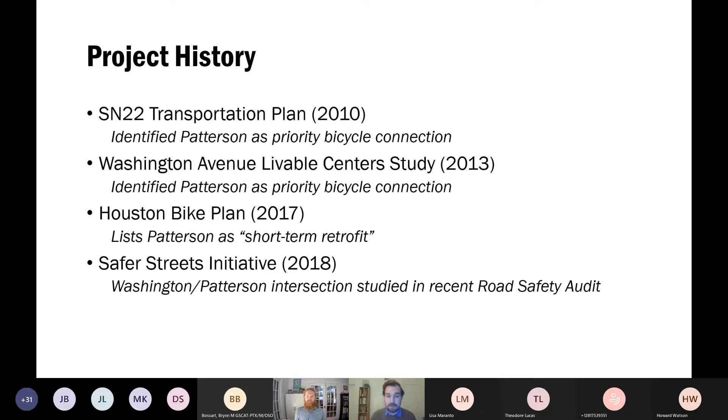And then again in 2018, this is not the entire corridor, but the intersection at Washington and Patterson. In the summer of 2018, Mayor Turner commissioned the city departments to look at the most dangerous intersections in the city to see what could be done to improve safety and comfort in those locations. Washington and Patterson was selected as one of them. So later in 2018, early 2019, a multidisciplinary team of state, federal, local, and advocacy group transportation experts took a look at Washington and Patterson to see what could be done there.

A little bit about the public engagement that the planning department has done on this project. We had our first meeting for the project in earnest in November 2018. That was at the Council on Recovery. I'm sure many in attendance tonight were also at that meeting.

We then had a series of meetings directly with the West End Civic Club, first in February 2019 and then again in May of 2019, where we talked a little more about the specifics of the project between Washington Ave and White Oak Bayou. We met again in June of 2019 with the Magnolia Grove Civic Club to gather feedback on the proposal. And then again, in January 2020, we had a pop-up bike lane event on Jackson Hill at the intersection with Scotland at the entrance to Buffalo Bayou Park, where we had a lot of attendees and gathered a lot of feedback and had folks actually able to test out the design for that intersection and for Jackson Hill Street.

So we've had quite a few touch points so far, but we have more news to share tonight.

A little bit about the project in general. This project aims to create a safe bicycle connection from the White Oak Bayou Greenway at the north, across I-10, through the West End neighborhood, across Washington Ave, and then down through the Magnolia Grove neighborhood, east-west via Blossom over to Jackson Hill, and then down Jackson Hill to the intersection of Scotland Street and the pedestrian bridge to Buffalo Bayou Park. Not only will this project create a safe and comfortable connection over a number of barriers like Washington Ave and I-10, but it'll also connect you to our emerging Bayou Greenways network.

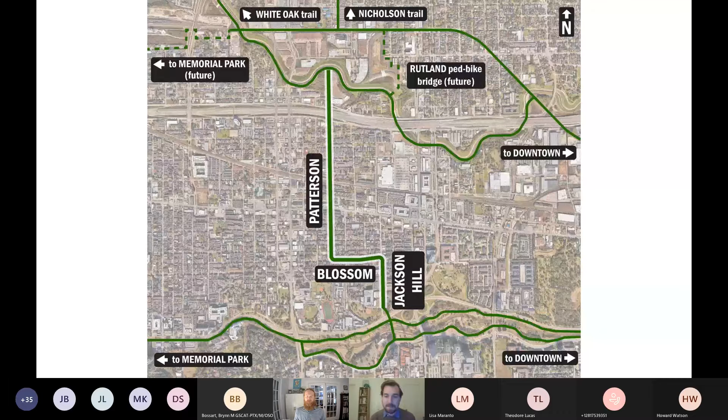And you can see on this map right here all of the new or future connections that you'll be able to make immediately from this bikeway. And then here's just a larger view of the bikeways in Houston, either existing, recently constructed, or on the books to be constructed in the next few years. Within the red circle is the Patterson Bikeway, but from there you can see a great number of places within the inner loop and beyond that you'd be able to connect to safely on your bicycle when this project is complete.

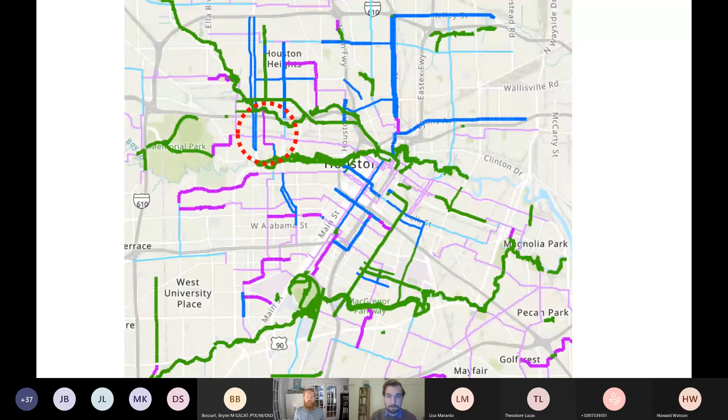So we're going to go north to south, talking about the different pieces of the project. There's a few different streets, a few different intersections, and some varied terrain, so there's various different treatments depending on where along the project we are. On Patterson Street, from White Oak Bayou to Washington Ave, it's an existing roughly 36-foot, sometimes wider, sometimes narrower cross section, especially over I-10, but this is generally the cross section you're looking at.

With parking on either side, our proposal is to make this a neighborhood shared street, to put in striping and signage to better communicate to folks that this is a shared environment between vehicles, cars, and pedestrians, and to get car traffic, especially, to slow down, make cyclists a little bit more predictable, and otherwise make the street safer. This is not the only means by which we hope to make Patterson a more comfortable environment for everybody. We have a few other more specific treatments for this stretch that should hopefully, in addition to the pavement markings and signage, make this a safer neighborhood street.

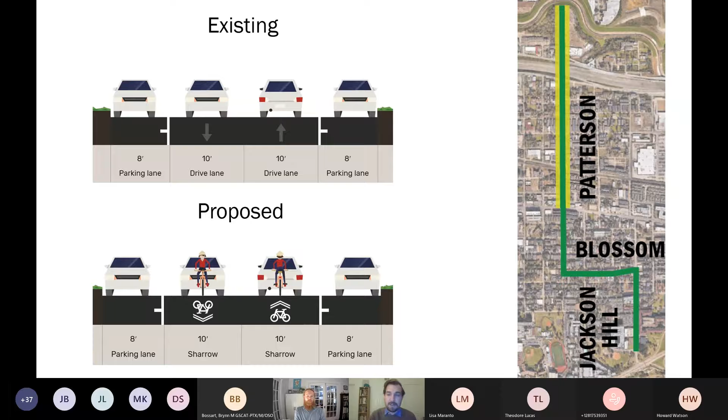So first, at the intersection of Patterson and I-10, particularly the eastbound frontage road on the south side of the freeway, we're proposing a short stretch of bike lane, about 100 feet, northbound in advance of the feeder road, to allow vehicles and bikes to separate out.

And then once at the intersection, cyclists have a little bit of a lead on the cars. So when it becomes their turn to cross, they're more visible to vehicles and they get first dibs at getting across over to the bridge.

Part and parcel of this treatment is also a no right turn on red at this intersection. At present there's a steady stream of cars taking a right from Patterson north to I-10 east, either on a green light or on red, which makes it difficult for cyclists to catch a break as they're coming across. So this will require all drivers to stop until there's a green light, allowing cyclists to get a lead on the intersection.

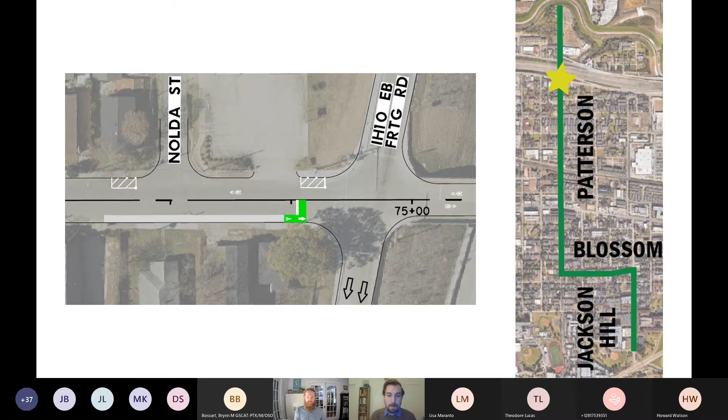That's a pretty narrow bridge. It's not really wide enough for a bike lane, but we think that this bike lane in advance of the intersection will make that experience a lot safer.

And here's an example of what a bike box looks like in the wild. This isn't in Houston, but you can get the idea of how cyclists are much more visible at intersections with this sort of treatment.

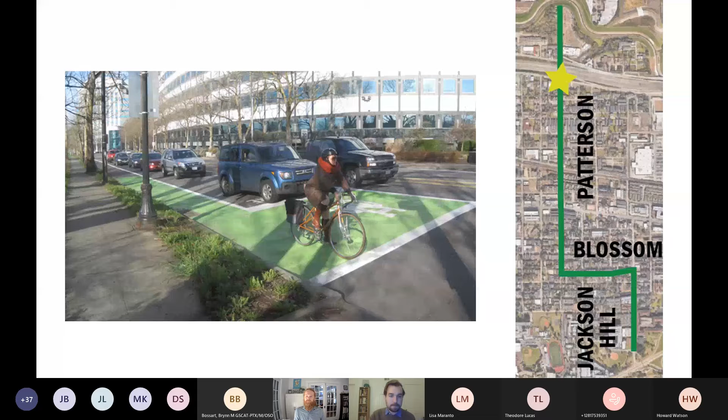Moving down, this is at the intersection of Inker to the west and Marina to the east. We're proposing a traffic safety island at this intersection to slow vehicles down. This is a tricky intersection - there are a fair amount of driveways, and also on Inker to the south, or on the east side of the street at the Inker intersection.

And on the west side of the street at the Marina intersection, it's really one intersection, and people, according to Texas state law, should not be parking there to begin with. So this is meant to better clarify what existing state law is around parking near intersections, and also to have drivers slow down by moving a little bit into the other lane. This is called a chicane in traffic speak, and it interrupts this long straightaway from I-10 down to Washington, better communicating to drivers that they're now in a slower, more local street environment.

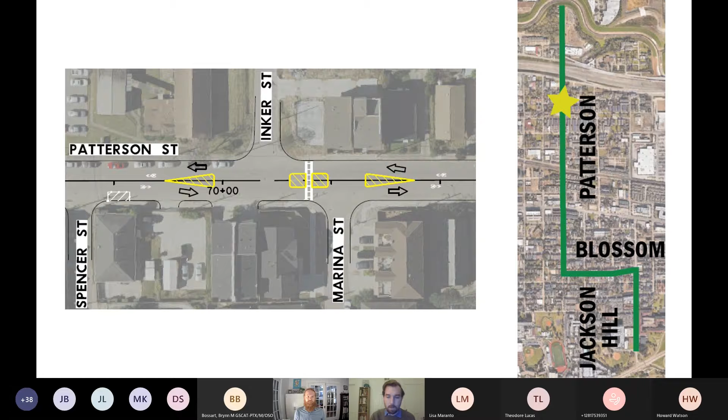A little farther down, this is Patterson at Maxey Street to the west and Kohler Street to the east. It's also right at West End Park. We heard quite a bit from the neighborhood that this is a rather dangerous intersection with pretty poor visibility - people come speeding down Patterson, and if you're exiting from Kohler or Maxey onto Patterson, you don't have great visibility and the cars are often moving relatively fast.

So our proposal here is to make this intersection an all-way stop. So no matter what street you're on, you'll have to stop, look around, and then only move once it's safe to proceed. We're also proposing some daylighting at this intersection. So in the 30 feet or so from the intersection where it is illegal to park, we're simply going to stripe that out and also use some physical obstruction to better communicate that it's not a legal place to park, and to establish a visibility triangle at those intersections.

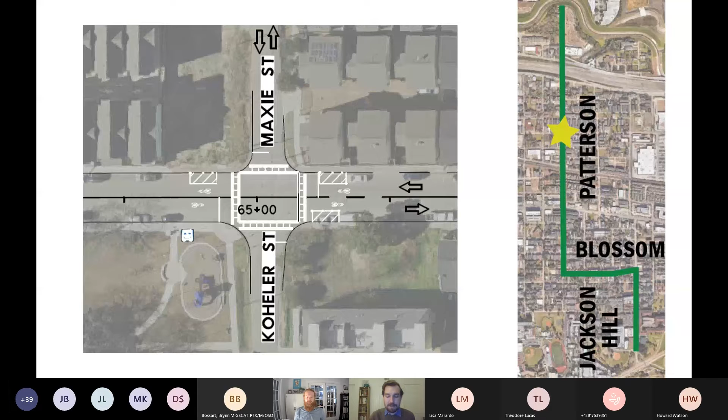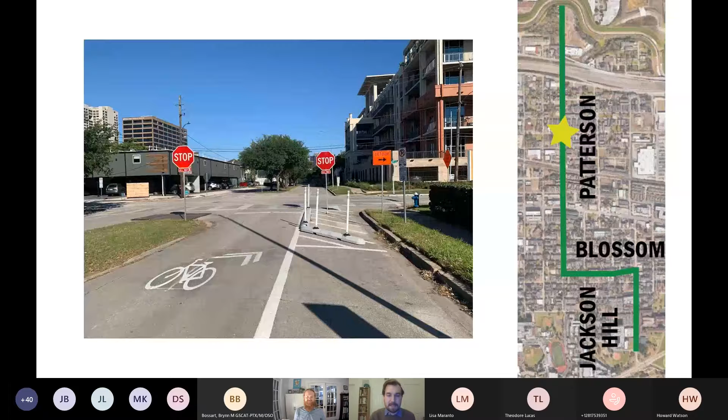At present, people walking and on bikes have to wait for a break in traffic in both directions and then cross 5 lanes. What this treatment would do is allow folks to cross one lane, one direction at a time, and only to cross 2.

So it's a much shorter crossing distance in each of those, giving them a space to wait in the meantime. This is the deluxe treatment of the range of median closures. Some allow left turn movements across the main street, but we're really going for the deluxe treatment here, which we think is quite a bit safer.

At present, folks can make a left off of Washington onto Patterson, and folks going down Patterson can either go straight or make a left. This would basically restrict all vehicle movements at this intersection to right turns, and we think this makes things a lot safer for all road users here.

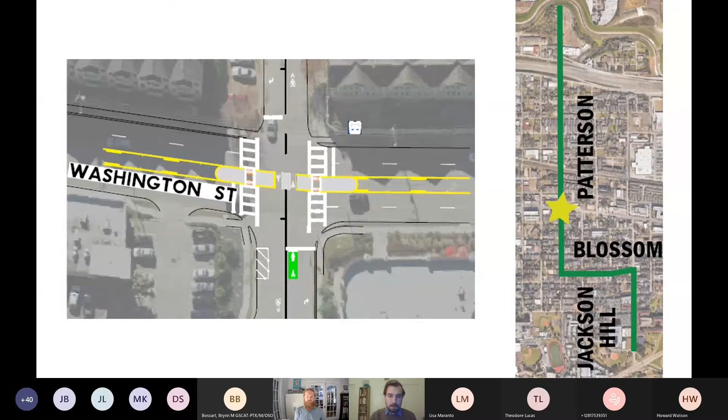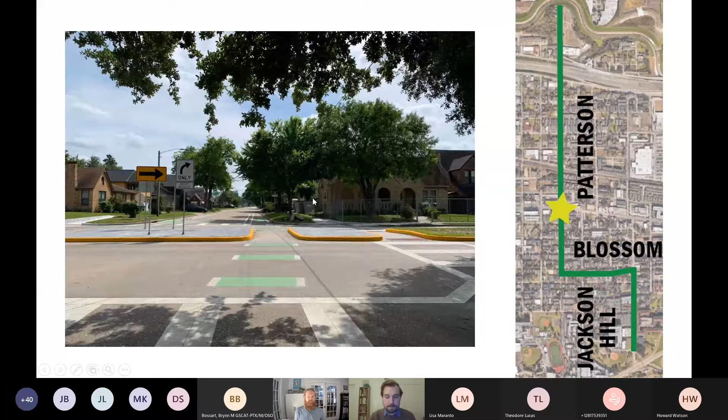Moving on down to Patterson Street south of Washington and Blossom Street between Patterson and Jackson Hill Street. This is a relatively narrow street, about 20 feet paving, often with open ditch. Folks are driving relatively slowly on these streets to begin with. They're very much neighborhood streets, so we're just trying to encourage that a little bit more with shared lane markings and signage.

Next is the intersection of Blossom and Jackson Hill, where folks will be transitioning from Blossom onto Jackson Hill and vice versa. This is currently just a one-way stop from Blossom, and Jackson Hill can move through here. We're proposing an all-way stop at this intersection to make all users slow down, take a look, see who else is there, and then proceed when safe.

We're also proposing a bike box on Jackson Hill going northbound, transitioning onto Blossom. This will allow folks to get out of the bike lane we've proposed for Jackson Hill, get a lead on the cars at the all-way stop, and then transition onto Blossom Street.

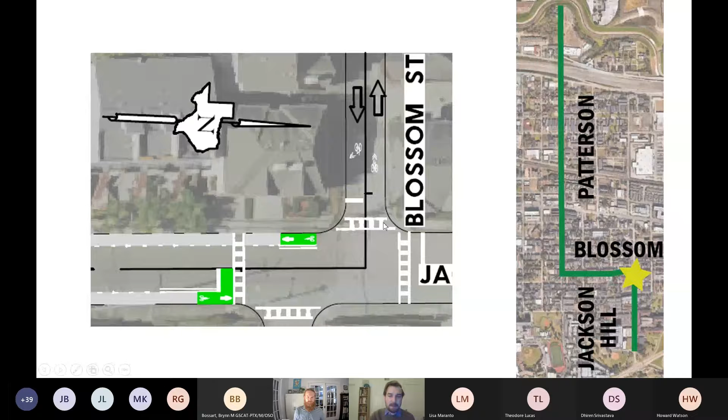Moving on down to Jackson Hill Street, between Blossom and Scotland Street down by Buffalo Bayou Park. This is an existing street that's about 36 feet paving section with 2 drive lanes and parking on either side.

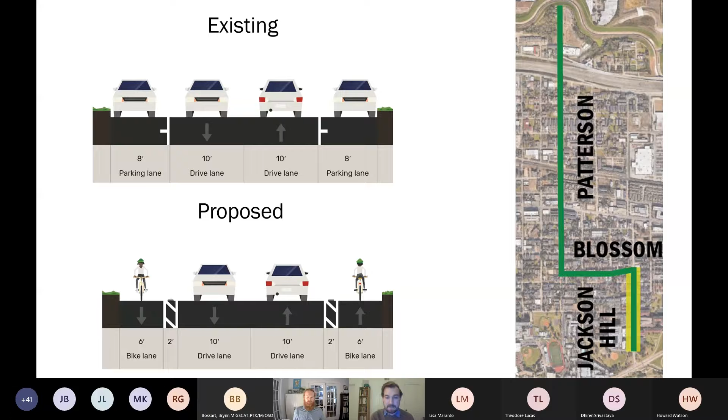What we're proposing is bike lanes on either side, repurposing the parking lanes and physically separating them with some sort of physical delineator. Jackson Hill has a lot of cut-through traffic that comes off of Memorial Drive, and we think the safest treatment for Jackson Hill Street is dedicated bike lanes on either side.

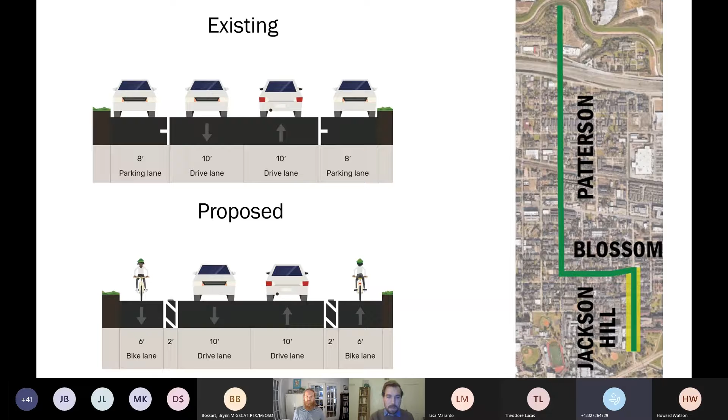This also transitions well into what we've proposed for the intersection of Jackson Hill and Scotland, which is what's called a protected intersection, where the bike lane movements are moved to all 4 sides of the intersection, more like the crosswalks, with cyclists crossing one side at a time.

Protected intersections really work best with bike lanes on the approaches, so bike lanes on Jackson Hill, which will be the major bike route through this area, are especially important in conjunction with this treatment. This will also allow cyclists to move onto Scotland Street from Buffalo Bayou Park if they choose, but that won't be the primary bike route through the neighborhood, so those bike lanes only extend a short bit out of the intersection.

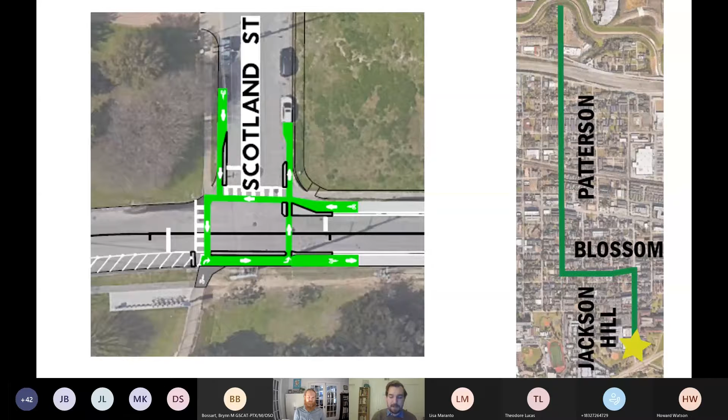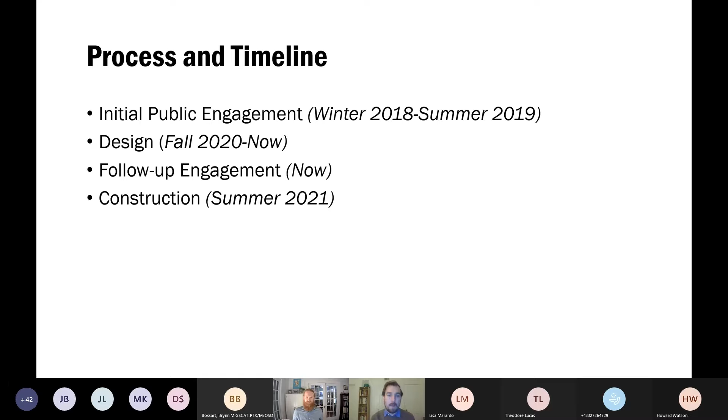Just a snapshot of where we've been so far. Like I mentioned previously, our first engagement for this project was in winter of 2018. For the past few months, roughly fall of 2020 until now, we've been working on these design drawings I've been showing tonight. With the feedback we get tonight, we'll further refine them, and we hope for construction to begin sometime in late spring or summer of 2021.

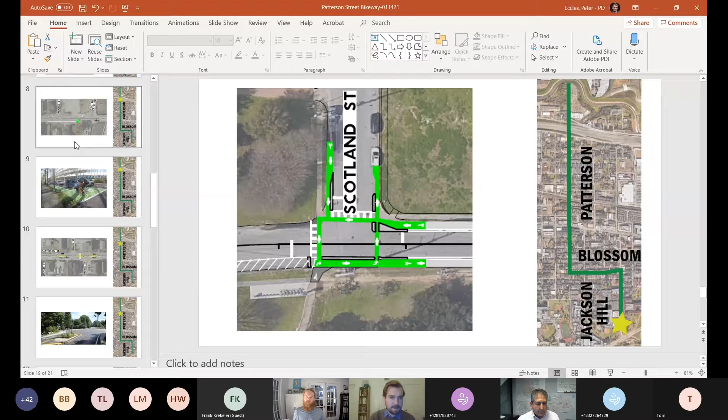Could I ask whoever asked that question to elaborate which portion of the Heights bike path? Are you referring to this Rutland Ped bike bridge? Yeah, I was referring to the part that connects Patterson to the bike path, wherever it connects into the main path, into the White Oak Trail. Oh, so at present it connects directly into the White Oak Trail right there. You can ride Patterson directly to the White Oak Trail today. This project aims to make Patterson a more comfortable street to ride on, but that connection is already open.

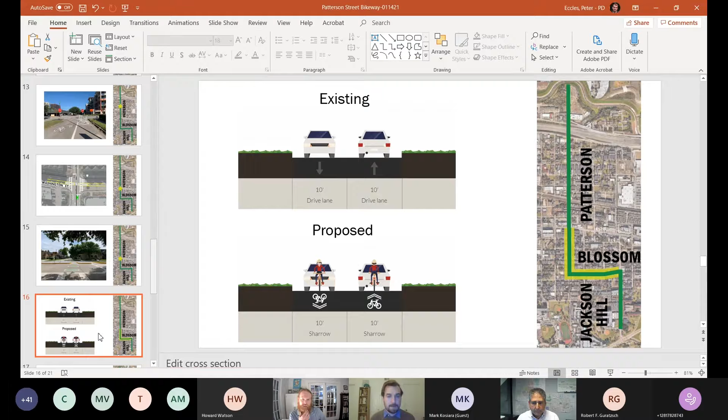Sure, I can elaborate right there. So Patterson north of Washington is substantially, maybe twice as wide as Patterson south of the intersection. We believe in that wider stretch that we can offer a short stretch of bike lane, this time on the left hand of the driver, to position people to that median opening for cyclists and to separate out that conflict before the intersection. On the approach south of Washington, if you're traveling north on Patterson to Washington Ave from the south, that's a much narrower street right there. So we don't think we're able to provide a dedicated bike lane in that space. In that area, the cross section would look much more similar to the rest of Patterson and Blossom south of Washington. And Pete, just to emphasize, that's a very short segment of bike lane. Yes.

That's really just approaching the intersection to help bikes get into a position to cross safely. And we looked at carrying it as far back as possible, but at a certain point you lose some of the benefit because you have a lot of driveways on each side of the street. So I think that's not typically where you'd expect a bike rider to be, in the middle of the street necessarily. Here is kind of a special case. We want you there because all the cars you're going to be conflicted with are going to be taking a right turn. So let's separate out the right turn movement from the bike movement, and that'll position you for the gap in the median.

Oh, excellent, okay, now I understand. Can I assume there'll be stop signs north and south and no special reason to slow down east and west? There will be signage that you're approaching a high visibility crosswalk. There'll be signage that tells you to yield for pedestrians and cyclists in the crosswalk, but there will not be a stop sign along Washington. Yeah, won't be a stop sign. We'll be using yield ahead, and some extra pavement markings and signage that really should help there, and we'll see how that works. Excellent, thank you.

Okay, back to the hands raised. Howard Watson. You've answered my question, thank you.

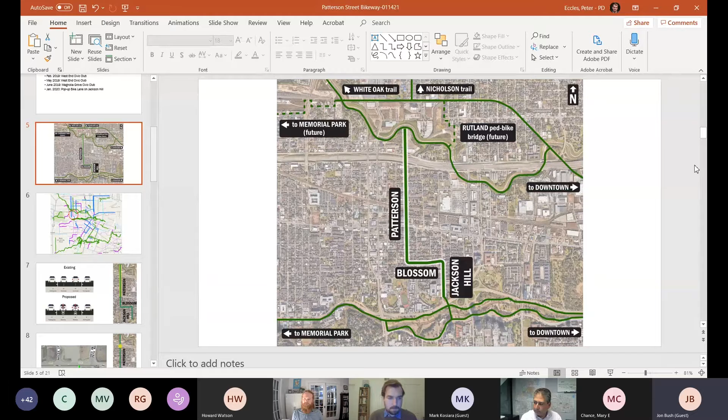Now in the hands raised, we'll go to Jon Bush. Hi, I guess I have 2 questions. The first one was just following up on that Patterson and Washington intersection. Will there be any type of pedestrian crossing signal similar to what's at Yale and the MKT trail?

So at this time, we are not proposing a traffic signal at this location. We think that the median closure is a good first step. And I can say that this treatment is very much compatible with a traffic signal if we decide to install one down the road. It's not one or the other, we're not precluding that. But within the scope of this project, the median closure is what we're proposing.

Okay, and then the other question I had: at the Patterson and I-10 feeder intersection, will there be a separate traffic signal for cyclists similar to what you see at the Lamar Street bike lane through downtown? I'm not sure we'll have a separate signal head for cyclists.

Ian, you have? Yeah, we're not planning dedicated signal heads right now, or where specifically. We emphasize them more on our two-way bike lanes, where you'll have people on bikes moving both directions on one side of the road. That's not typically where you expect a bike to be at an intersection, and they also can't see the signal head, so we have to provide them one when they're moving in that direction. For here, this will just use the existing signal system.

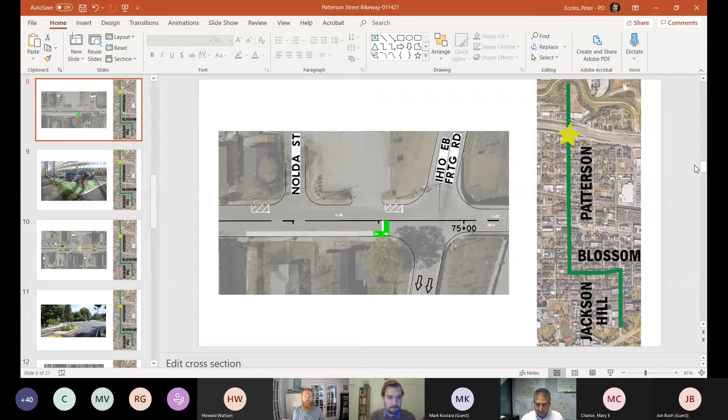Claire? Okay, again, off topic, but I'm wondering what is up with that church that's for sale on Patterson, just south of I-10 on the west side of the street. I think it's St. Mark's or St. Paul's Methodist, I don't remember exactly, but I passed it. It's a big parcel of land, and I'm wondering if y'all know what's going on with that.

I apologize, I don't know. That seems like a question that somebody in the audience might be able to type in the chat if they know. But yeah, I've tried to search it on Google, tried real estate sites and commercial real estate sites to see what's going on with that. I see the for sale sign there, but I haven't been able to find any information. I'm just curious if that's going to be like a big ass high rise or something. If anybody knows, it'd be great to know.

Thank you. And there's a question in the chat, this may be following up on that church question: where was the land? Walker Shores, is that what you're asking?

Yeah, I just wanted to hear again what part of the land you were talking about. Okay, it's on Patterson, on the west side of Patterson, just south of I-10. I don't remember the cross street, but I think it's north of West End Park on the west side of the street.

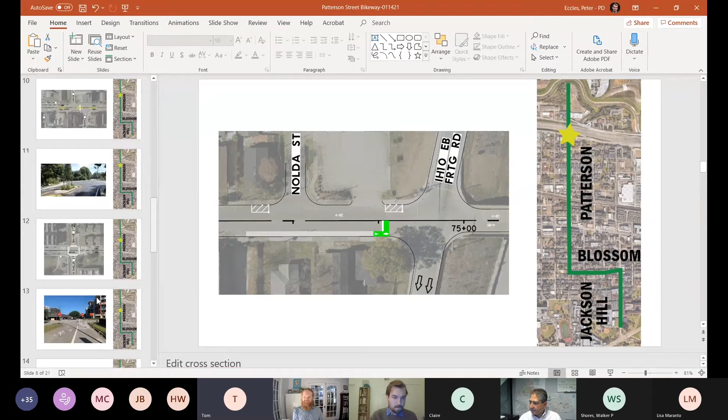Sure, so our best estimate at this point is summer 2021, but as Ian will be more active in that contract down the line, do you have anything else to add?

Yeah, that seems about right. Our design consultants, I think some of whom are here, are working very diligently with us to get the designs wrapped up. At the same time, we are also working internally to make sure that our contractors who actually do the construction are on board. They were close at the end of last year, so I think they're either there or on the verge of it. So by the time we get ready with the design, the contractors will be on board. Summer seems very reasonable.

Very good, thank you. Yeah, no problem, Tom.

Back to the chat. Any adjustments being made for the railroad crossing? Maybe something similar to the light at I-10. So of this entire project, the railroad crossing is probably the piece that we have the least control over. It's currently a relatively narrow paving section, so we can't really add anything to that. Don't believe that there's space for a bike lane or a bike box at that location.

Additionally, that's what's called a quiet zone railroad crossing, which means that there have been some modifications to allow trains to move through there without activating the horn as much as they usually do. So we probably can't mess with that intersection much more than the changes that have already been made.

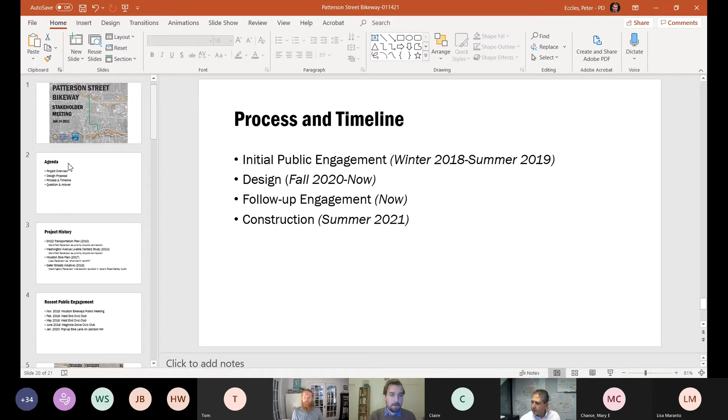Back in the chat: how do you plan to handle the blind spot when crossing the north side of I-10 feeder at Patterson? I presume the viewer is referring to the westbound feeder road on the north side of I-10. Does that person mind either typing in the chat or unmuting to elaborate a bit more on the blind spot?

They've confirmed no mic, but they've confirmed that's the location. Could you type a little more about the blind spot, please?

I'm thinking it has to do with the fencing around the freeway. But yeah, I would be a little interested to know too, exactly.

Okay, yes, I'm on. It's a really sharp turn too. I didn't pose the question, but it's a really sharp turn. That could be why it's hard to see. It's hard to see onto the bridge. If you're going up Patterson, going over the bridge and trying to cross it from the right side going north, then it's a sharp turn for cars.

I do go down it almost every day, and it's almost impossible to see around the corner there because there's a big concrete barrier and a fence, and it's very hard for cars to see you crossing. I think that's the big concern there.

Right, yeah, that's definitely a tricky spot. Thanks for raising that. We can take another look.

I will say that section of the project, the bridge, the feeder roads, and the initial lead up to it, is controlled by TxDOT, and this is not a TxDOT project, so we'll need to clear any modifications of that area with them. Whereas basically the rest of the stuff is squarely within our jurisdiction, and we're quite sure that we can implement it.

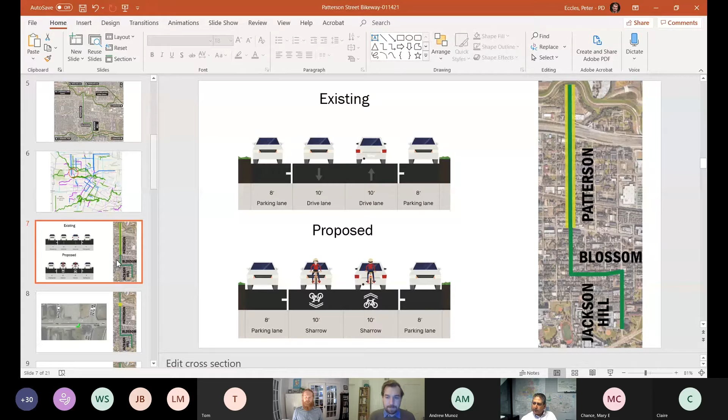There's a request if you can flip to the slide with Patterson and Washington again. There's no question, people would just like to see it.

I'm going to read out one comment: that we've done a good job and we should start the project soon. And I think you guys have done a great job reaching out to the community. Thank you for those, we do appreciate it.

And suggest having people identify if they live in West End or Magnolia Grove. But I'm a little uncomfortable making people say exactly where they are, who they're from.

This is a public meeting, everybody's welcome. Oh, I'm sorry, I apologize, this is your community meeting. If you'll raise the hand.

Well, I guess in a community meeting, if you would like to identify where you're from, I think that would help. The only reason I would value that is to know what communities we've impacted through this presentation. And if you're not even from this neighborhood, I think that'd be interesting to know. But we will not force anybody to identify.

Thank you, Ian. This is Karen and Ross Mattern, and we're part of the West End Civic Club. We very much appreciate you coming out to our meetings in 2019 and sharing the plans and really listening to the community on the things we've been looking for.